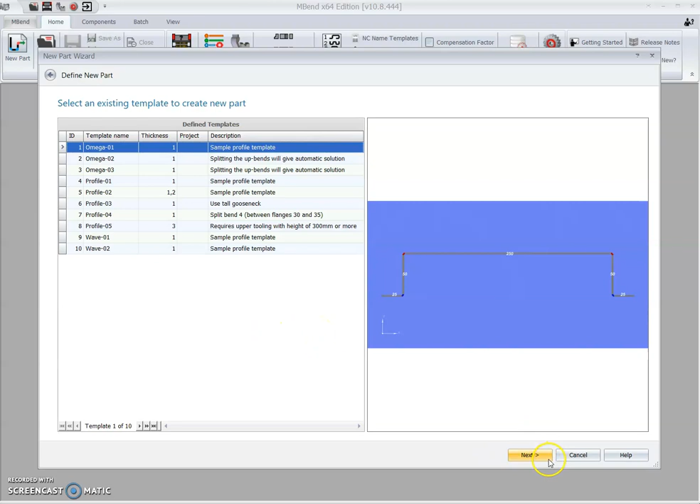Selecting templates, Omega 1, it's a pretty simple one, the most basic. The further you go, the more difficult it gets. So basically, when you go through all these, you can have the basic idea of how to do anything. Only the basic idea, obviously, but it's pretty helpful when you first start learning how to use the software. And then we go next.

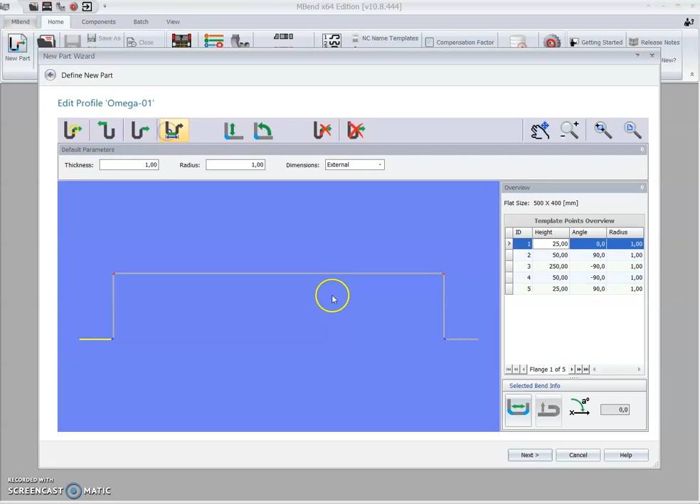This is designing. You can insert a flange wherever you want, at the end or the beginning. Only the beginning, only the end. Edit, which you can also do by selecting from here. It highlights the flange or flange bend step you have selected. It shows height, shows angle, delete step or delete everything.

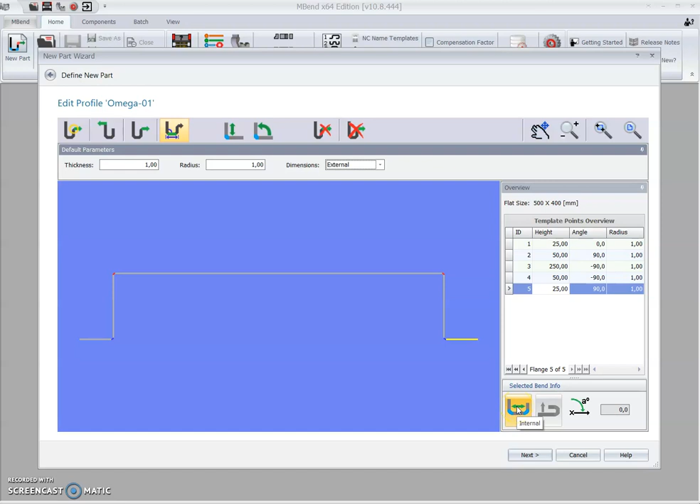What's the thickness? What's the radius? What are the dimensions? Are they external or internal? By default usually external, but it depends. And here you can also see whether the selected bend length and height are internal or external. And here you can basically see the 2D file again. Sorry. So you can see the 2D file here again.

Base flange length, you can edit it here again if you want. Template name, if you want to save the template under another name. The project description, anything. Next step: go to design, which is where we just were, or simulation, where we'll go. Machine name: you can select the machines. By default, when you get the software, it only has the demo machines and the one machine, in this case G40.

Tool stations: if you have saved tool stations, which basically means you want to always keep the tools in the same location, you can save it here and try to work with them as long as possible. Auto processing will try to do the bends with default tools or tool station setups that you have saved. This machine doesn't have default tools or station setups, so the auto process doesn't do anything. But when you go to simulation, it opens the part and loads it.

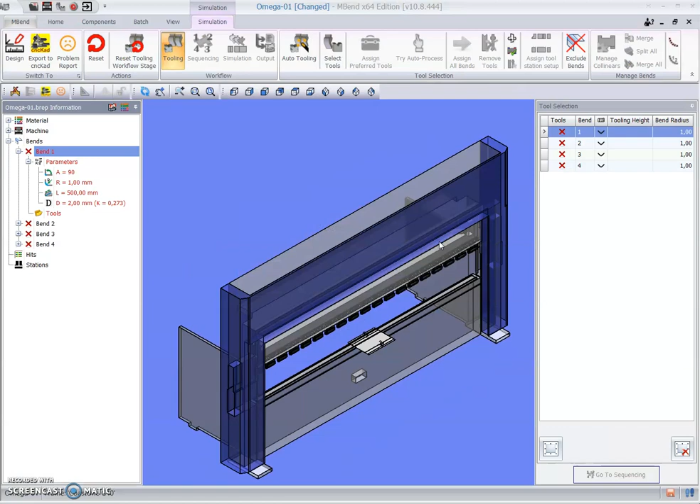Depending on the part and the computer, the speed varies quite a lot. And now the auto processing doesn't do anything. And here's the part, a really simple one. In here, you can also reset the tooling workflow or reset the design. And here's the order of where we go: first tooling, then sequencing, then simulation, then output.

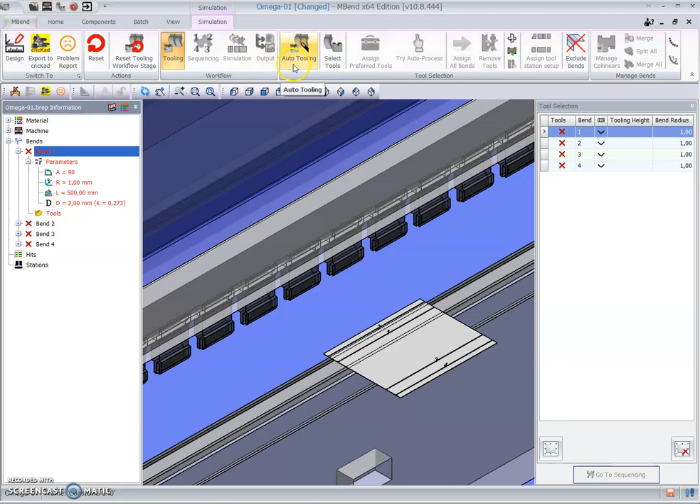If you do the auto processing properly, it goes straight to simulation. Auto tooling, depending on how many tools you have and how complex the part is, takes a long time. Or not that long. And here you can see the bends, different parameters, what's the angle, what's the length, and so on. Different colors for different directions.

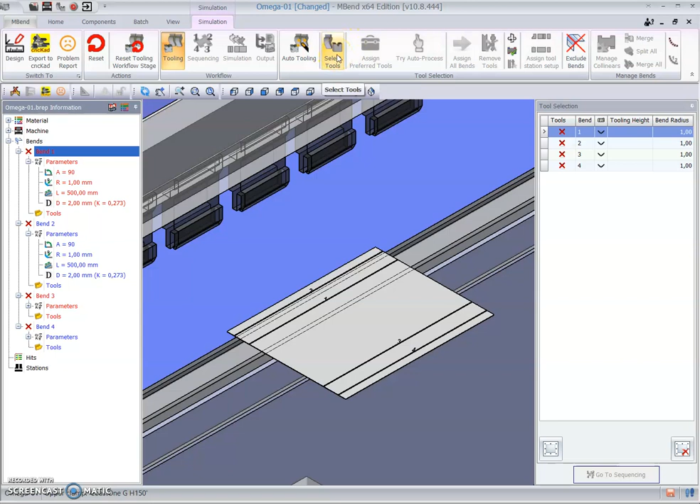But I always suggest in the beginning, always select the tools so you know what you're doing. You know what tools work in what situation, so you have a faint idea of how bending actually works before you just trust the computer blindly. Blindly trusting a computer is always a bad idea.

But let's just go select the basic punch tool 1193. Pretty basic. It shows you the punch name, manufacturer, this is the ID in the machine itself or software. Punch name, what's the joint, what's the height, working height, radius, angle, max tonnage, is it a hemming or is it a joggle? And same with lower tools. And for lower tools we go with 3037, which is a V8. Here.

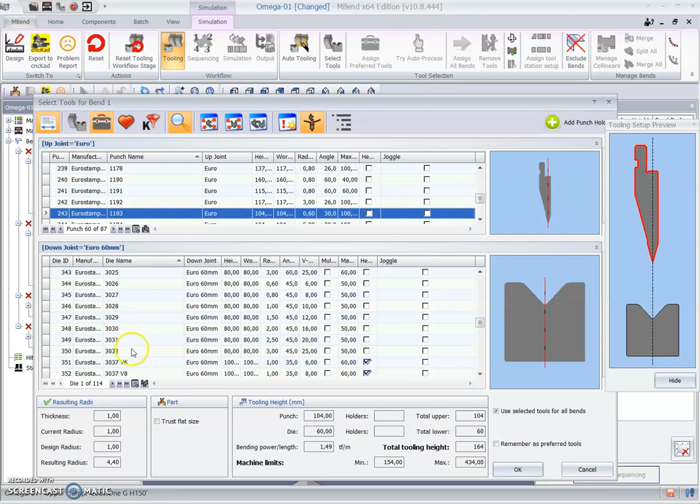And in here you can see the thickness, radius, design radius, and resulting radius. If you go with V6, you can see the resulting radius is 0.8. With V8, it's 1, which is the same. Trust flat size, meaning that you always trust that the flat is correct. Depending on the designers, depending on how they design the part, is it a flat-based system or what, you can do it, but it's basically up to the person using the software. Do you want to trust it or not?

Here you can see the tooling height. The only thing you are interested in is total tooling height and maximum and minimum. It always notifies you when it's not possible to use these tools in this machine. Here you can select to use these tools for all bends. You can also change them later, but usually always use the same tools in all bends if possible. And remember, you can set these current tools as preferred tools.

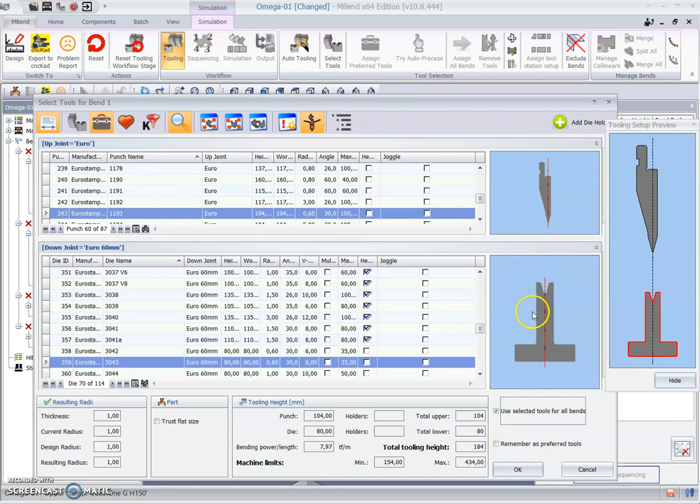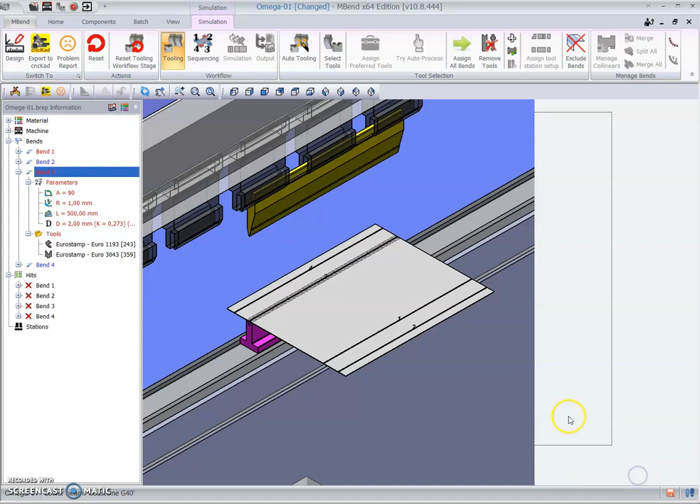And here, basically this is all fine, but you can also select tools, and then do the same thing, but remove the use for all, and it will use different tools for this particular bend. But then we go to sequencing, which is basically managing the order of bends. At the beginning, I can see that we're going to do 2, 4, and then 1, 3. So number 2 is first, then number 4, 1, and 3.

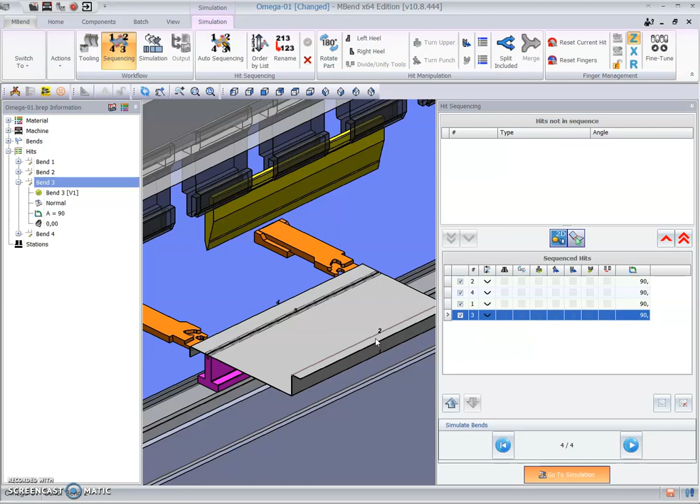It's always a good idea to know what you're doing. It takes a little bit of time, but the longer you use the software, the longer you bend, the easier it gets. Obviously, this is a really easy part, so it's not that difficult. But on a complex part, it takes a long time to know what you're doing properly. But it takes time. Nobody is perfect on day number 1, so there's no pressure.

Then it's, do you want to see the 2D or sequence interactively? This is interactively. 2D is just a 2D image. And here you can see, do you want to ignore them? Do you want to use heels, which is basically the notches here? Do you want to flip the part or rotate it, like 180 from this end here? Do you turn the upper holder, upper punch, or turn the die or die holder? And do you want to divide the tools so that there's small gaps in the tools, and this is the angle.

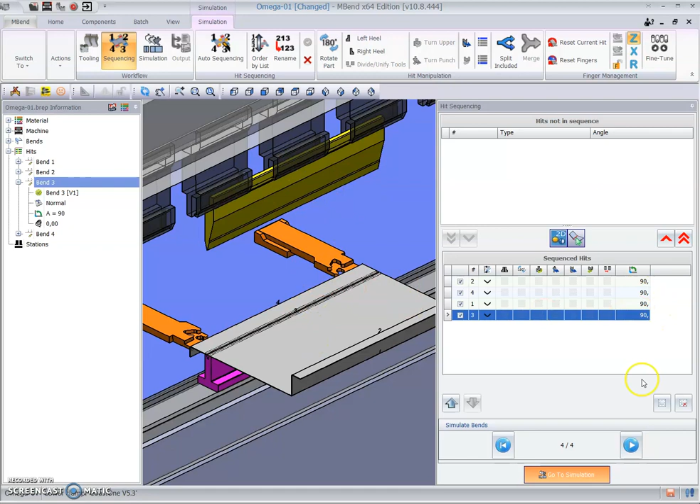But then we go to simulation. You always have to go to simulation and simulate it, because during the simulation the machine checks the collision. So you can't go directly to output, you have to go through here. Hit parameters shows you the hit parameters. You can take a video, snapshots, or clear the memory.

You can rotate the part. It doesn't work on simulation, so I don't know why this button exists here, but never mind. You can align the tools left, right, middle, always to the center in our machines. Reset hits, reset fingers, which puts them in the standard location, and you can modify or fine-tune the location of tools, fingers, and everything.

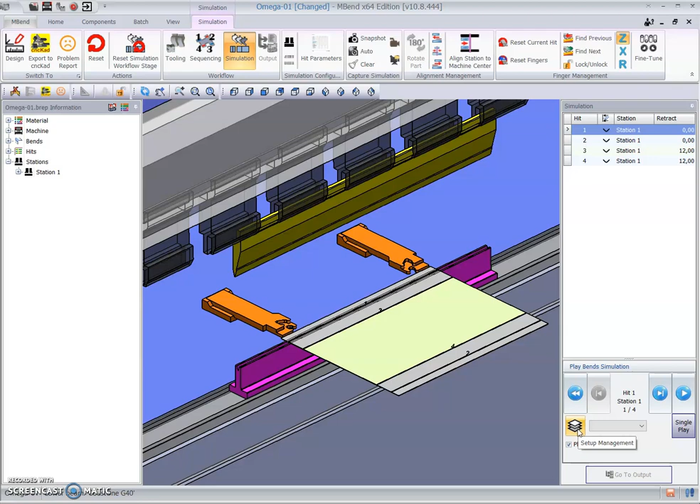If you want the fingers to be closer to the middle or somewhere in your own location, then it works. Here you can use the setup management, which basically means if you have 3 setups here, here, and here, you can move them around as you want.

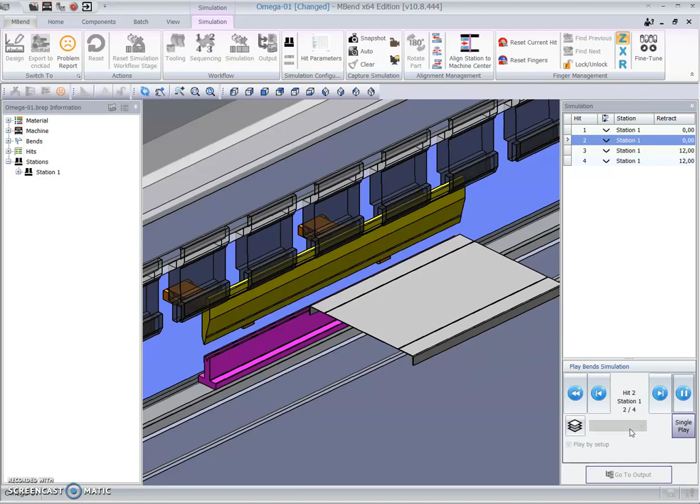Single play simulates 1 bend at a time, and play current hit forward, and this is the next hit, and so on. But you have to go through every single bend so that the machine knows that there's no collisions, nothing's dangerous, so you can work. You can always ignore the collisions. If it detects a collision, you can ignore it, but I suggest checking if it's actually detrimental or not.

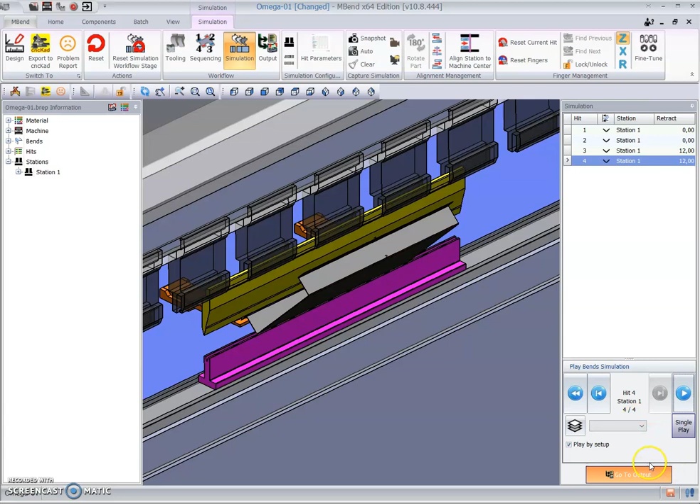Sometimes it complains that it hits the punch, but it's supposed to hit the punch if it's a complex part or something like that. But then we go to output, which is actually, well, the output. In here, you can name and control. You can change the name of the tools if you want, or materials, which is also here, but here, advanced. Generate report, where do you want to save the report, and report multi-finger.

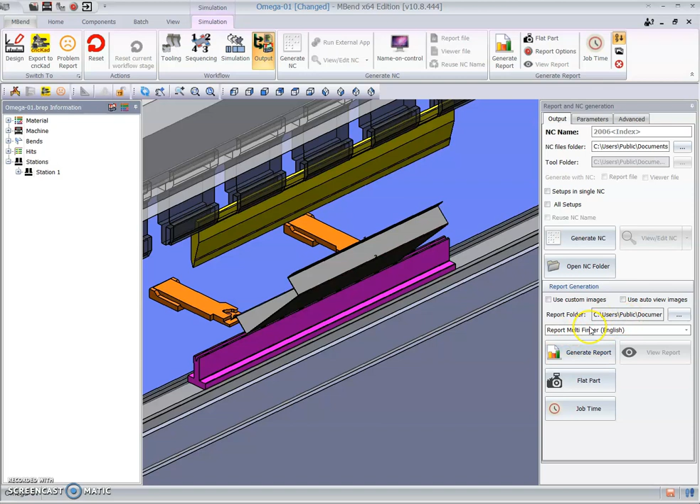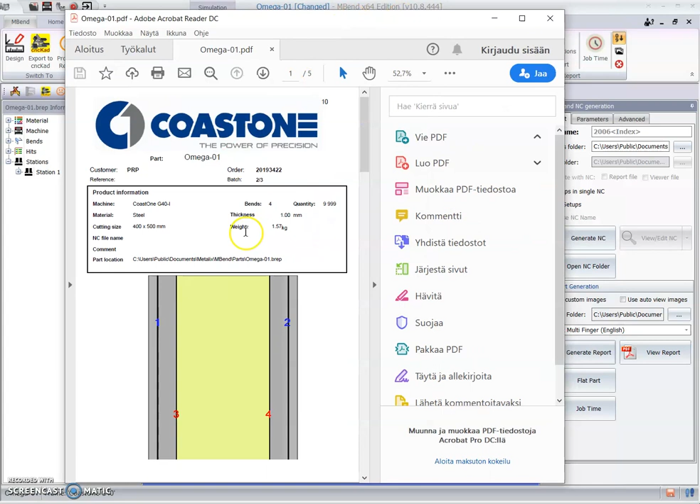Let's just quickly generate the report and see what happens. It takes a picture of every single bend, because it wants to show the user how the bend is actually made. And it should be now. Yeah, it's saved to here. View. It basically shows you the basic information. Quantity is always 9999, but you can change it in the controller of the machine. Approximate weight, thickness, size of the cut.

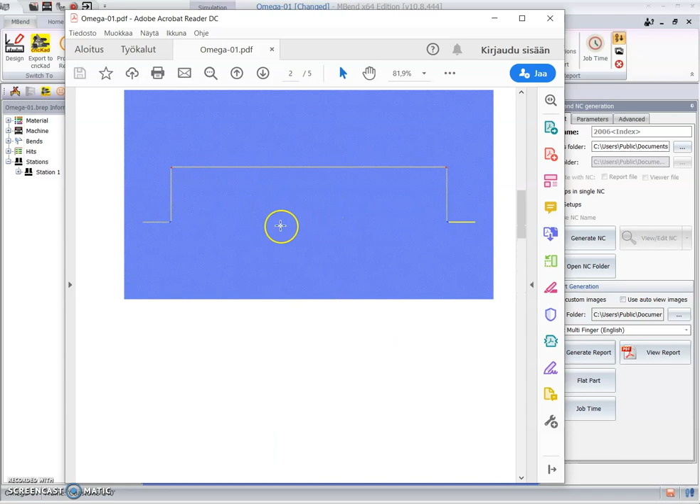The logo here doesn't show properly because it's not a PNG file that I put here, it's a JPEG, so it looks like that, but as standard it's a Metalix logo there. Usually it shows the 3D part here, but because this is a 2D made in the machine, it shows the 2D. Here you can see the tools. What tools do you use? Is it a left heel or right heel? What's the length, position, and what's the segment? And is it a rotated one or not?

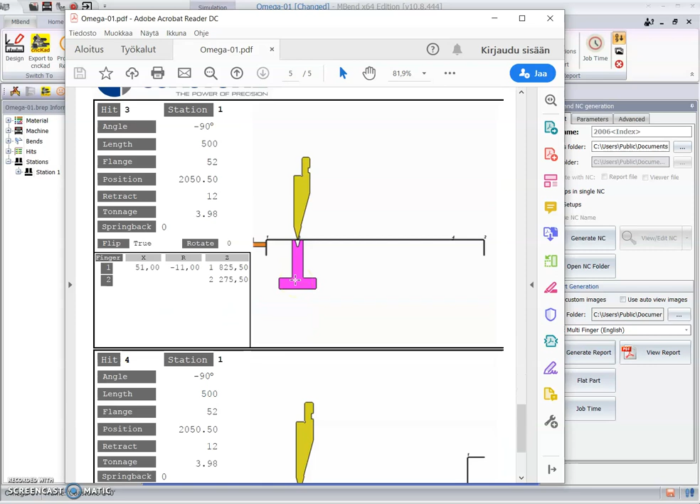And then you can see basically the bends order. In complex parts, this is quite helpful, but in simple parts, it's not necessary to show this report to the user of the machine. But it's a good idea that it exists. Flat part takes a picture of the flat part. Pretty simple. Job time, it's a negative instead of positive, so it thinks that it takes a longer time to do something than it actually does. So it's in the proper order, in my opinion at least.

You can change the name of the NC, so what's the program name in the control, and what name it uses. These you don't have to care about, setups in single NC or setups. You can basically do separate NC files for different tool setups if you want. But we support a multi-tool option up to 3 different tools, so it usually is not necessary.

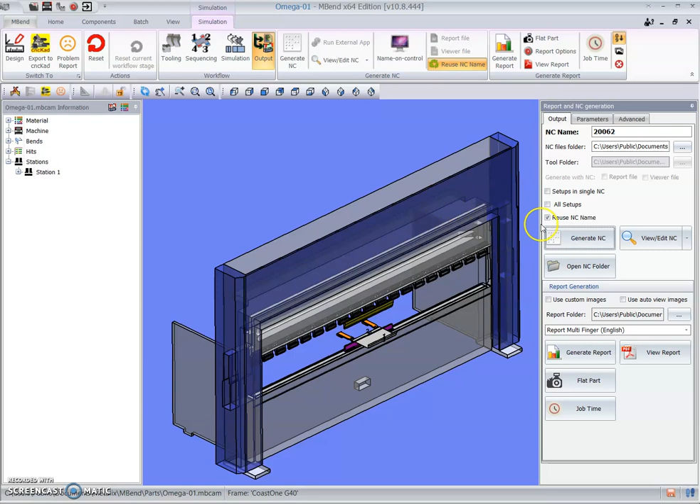Generate report, or generate NC. Let's generate the NC code itself. Takes a picture, NC generated successfully, everything is fine. View, and now you can see what the NC file looks like. There's the tools, quantity, material, thickness, and so on. You don't have to care about this that much, but it's a good idea to know what it should look like. A lot of zeros and different numbers.

And then you can open the NC folder and put it on the server or plug it into the USB stick if you want. But that's the basic idea of how you use the software.